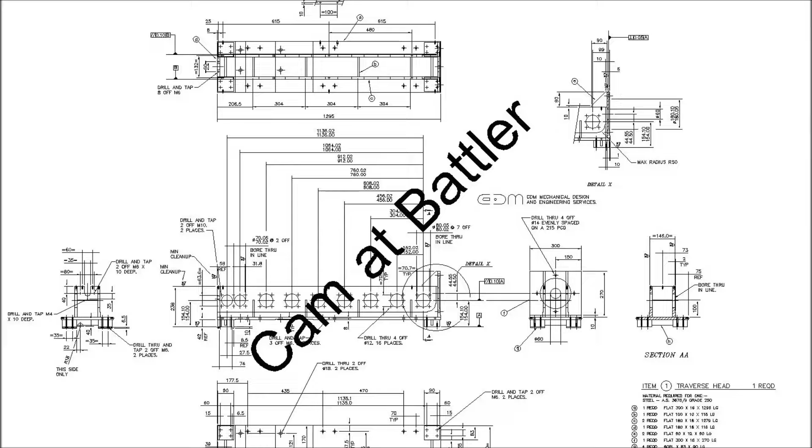I was sort of getting to the last bits of machining up the crank arm, and it was coming together beautifully. Beautiful feeling finishes, everything bang on tolerance, looking really good. And had a major slip up at one of the final machining operations, and yeah, it's now going to go into the trophy case. It's a throwaway, so I've got to start this one again. But you'll see what happened at the end of the video on that last machining operation.

But a lot of it comes about because I'm rushing around too much. I'm rushing around an awful lot. Running late from work to get to the school pickup. My wife's working back at work, and she's got to get home to get stuck into her study. She's got a paper due at uni, so she's flat out with that. Trying to get tea organised, then doing the drop-offs to the sporting activities, and then organising the pickups, and sort of getting out for 5 minutes here, 10 minutes there, watching the clock before I've got to go and pick the kids up again, and just not thinking, and bang, it's stuffed, and yeah, we're starting again.

So I'll pick up on this from where I finished off, where I stuffed it. So it's been a bit of a long road on this one, I must admit. I don't get a long period out in my workshop. I sort of maybe get an hour at a stretch at a time, and that makes it a little bit hard to try and get the continuity happening on projects. And I guess that's one of the reasons why this is taking so long. And I must admit, when I do get here, I really enjoy it, but it's not as much as I'd like, and that's family life.

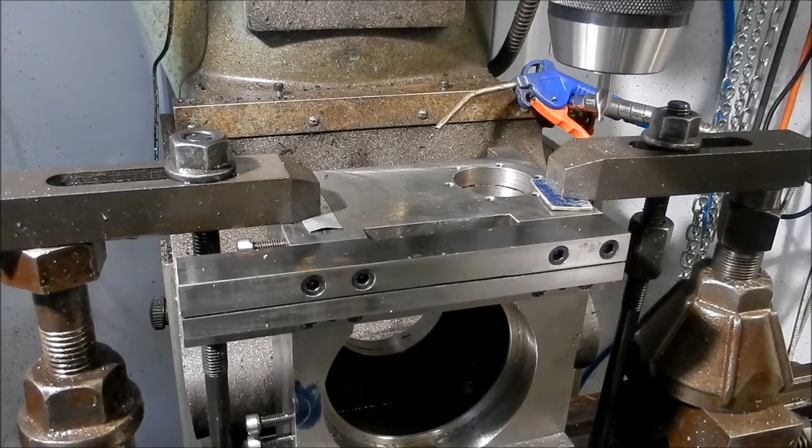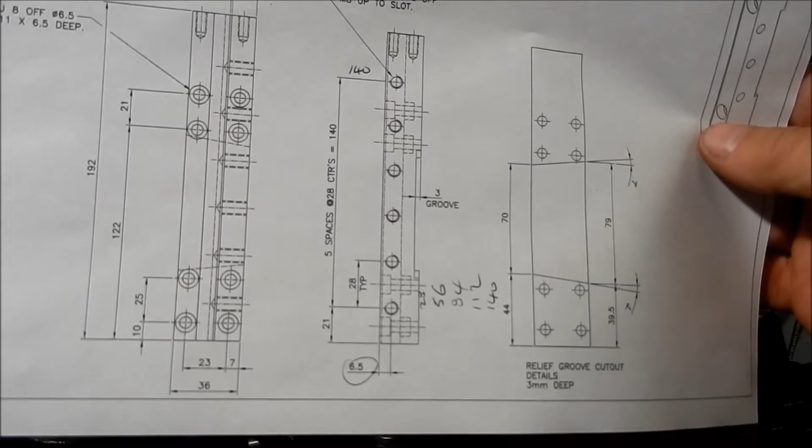We'll see how that comes up. All right, so what we're going to do tonight is the drilling and tapping for the gib adjusting screws. You can see them on the side here. I'm actually going to drill through with a flat bottom drill and just spig it in a couple of millimeters rather than doing it through with a drill point. So tapping size for the M8s is 7mm, and I've just ground up a flat drill to do that little divot inside, and then we'll just reshape the ends of those little grub screws.

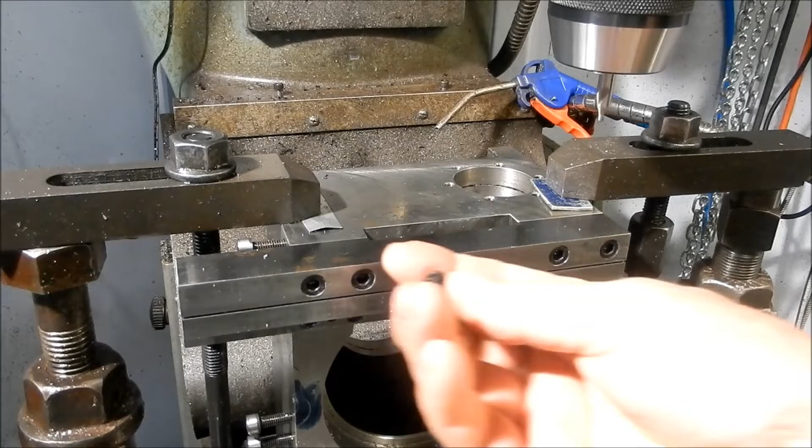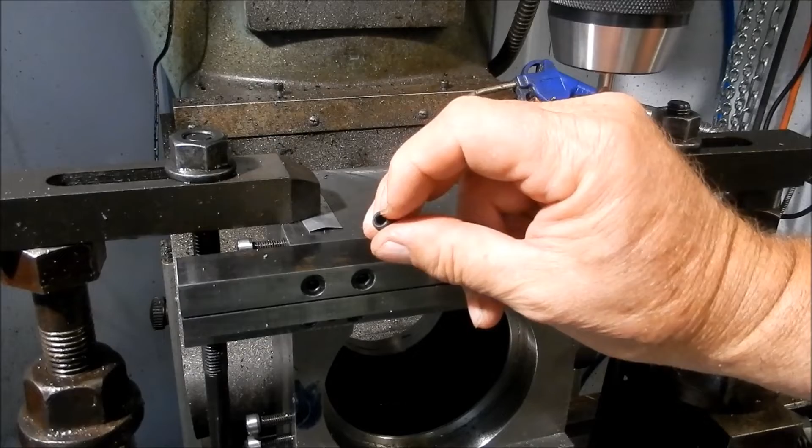So these blokes just here, we'll reshape those so that they fit in. I could have gone M6 there, but with the grub screws, the Allen keys are starting to get a little bit small and fiddly, so M8 with that size Allen key is quite comfortable to work with to nip them up as we're going. And as you can see, I've actually stoned back, and it's come up fairly good where we cut that slot with a slitting saw. A little bit of damage just around here where I was in there with my picking tools, picking teeth out. And what I might even do is run a tool down there with an arris.

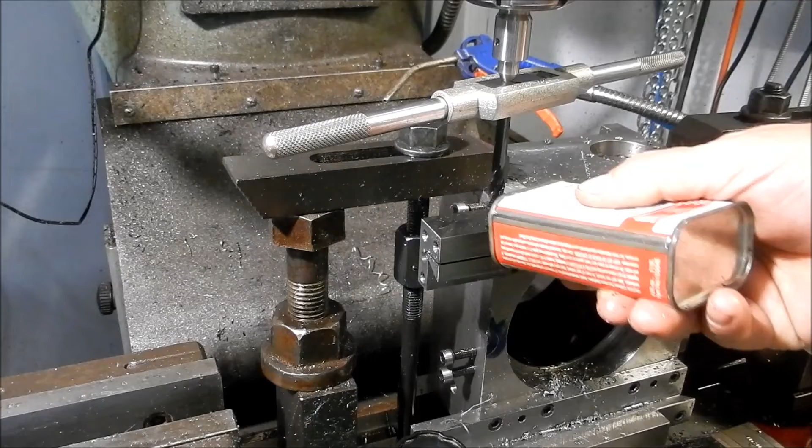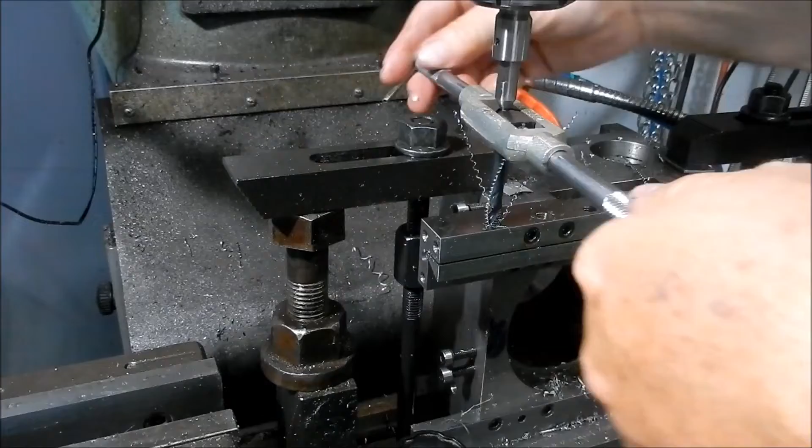Alright, last one. That's it. So these spiral taps are absolutely wonderful. I'm really converted to them. No chips getting stuck on the bottom. Jigs out beautifully. That's it. Alright, I'll just run over with a chamfering tool and just deburr those out. And we'll set up next to do the modifications to those grub screws.

Alright. Finally finished with this Gib set. Thank goodness. It's been a bit of a saga.

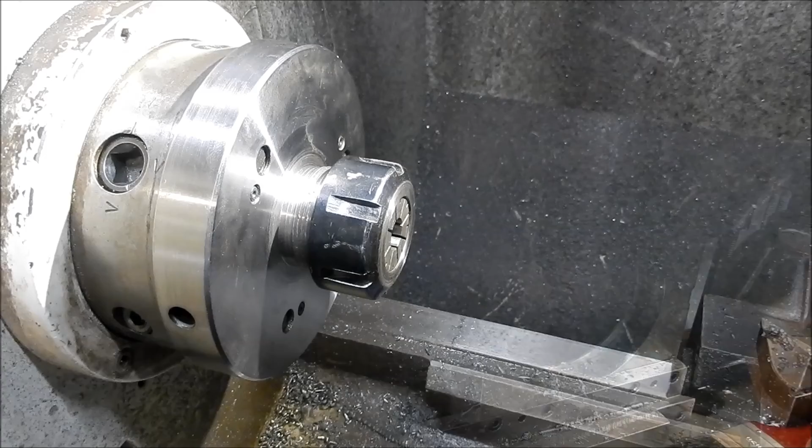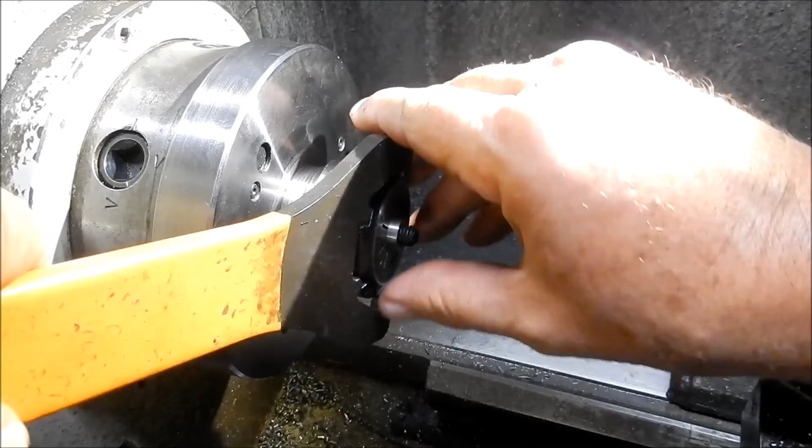Alright, we got there. Alright guys, so just modifying these grub screws for the Gib adjusters. And I've just made up a little split collar. Once again, that was just turned down and slit with the hacksaw, which is a much safer way of slitting, believe me. So it's much as we did before with the other adjusters. And I'll just try and work around the camera a bit without knocking it too much.

So I just turn the thread down for a 3 mm length down to about 6.5, face it off, and then we use a universal radiusing tool. Just use a file. Just trying to work around the camera here. Out she pops. And there it is. Nicely radiused off, ready to go.

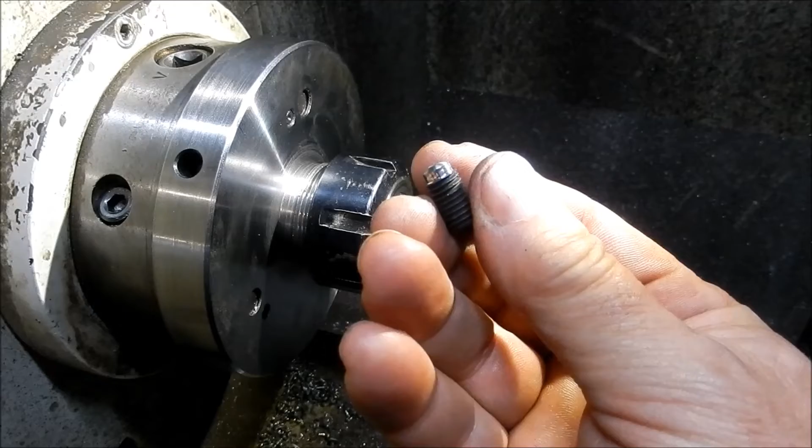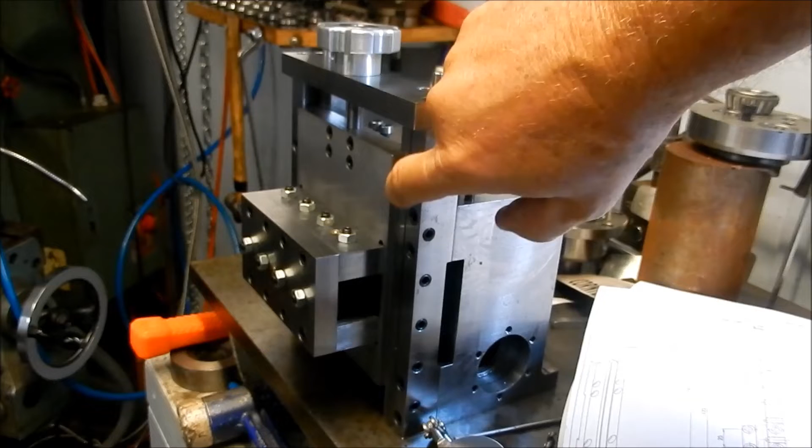Righto guys, we've got our little Gib adjusting screws in. So that's got a nice firm feel to it, going up and down. I'd say that when I've slit that, it's sprung just a little bit. It just went in just by tapping it with the palm of your hand. But once these get nipped up, once you're on centre, or the position that you want to be for your side cut, I won't push this, but that has locked up very tight. And it doesn't take much.

Now, realistically, I'm probably only going to use 2 of these at any one time. But no, very happy with the result. So that'll lock that nicely in place to do our slotting with the ram. All right, it's another job down.

Next thing I think I'll start is the crank arm. It's going to be moving in and out of here on the crank disc, which is, I can grab it up here. So that's our crank disc. So we'll make up the crank arm and the pins, and we'll start getting that into play. So it's sort of starting to get fairly close towards the end.

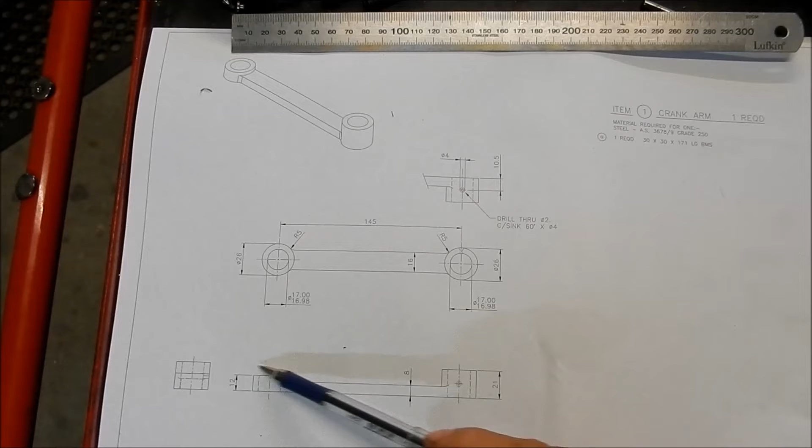Yeah, we'll rough it out with a milling machine first, get it to shape basically, get the holes bored, and then we'll set up in the rotary table to do the hemispherical ends on them, or spherical ends. Once again, I've got lubrication that does drop into there that feeds the bush, and we're going to have lubrication into here through the actual pin itself.

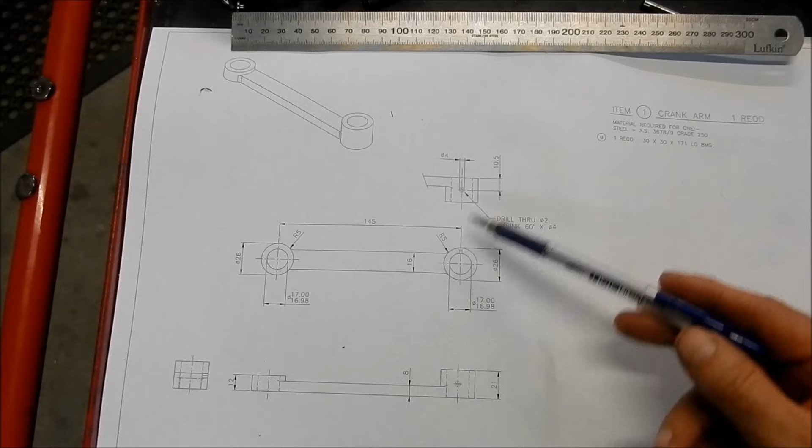So fairly straightforward. I had down there 30 by 30, but I haven't got any 30 by 30, so as I said, it'll be a bit of 25 by 50 stock. So we'll go and find some more stock that we can do that with, and we'll make a start.

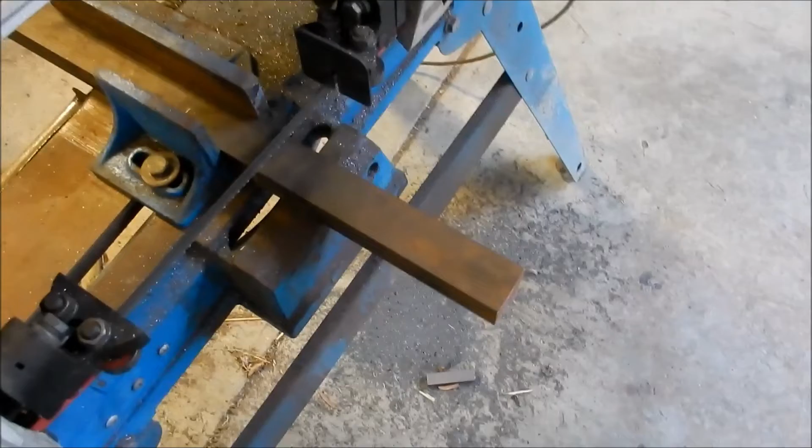Alright, change of plans again. I found a bit of 32 square stock, which I think is the old 1¼ inch stuff. I had this stock lying around for a long time. I've made up a whole heap of T-nuts out of it, and I knew I had it somewhere, but I couldn't find it until just now. So we're going to use that for our stock to make up the crank.

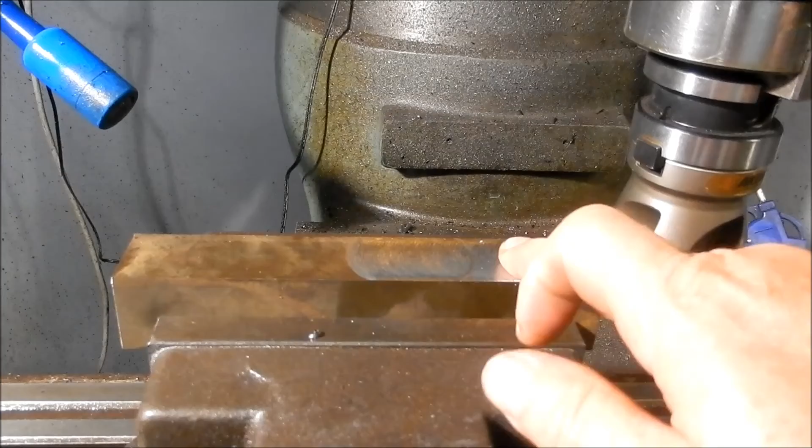Alright, done. I think we'll kick off on the mill first. Righto, I'm just going to take a couple of mil off all round on this, maybe 3 mil all round. The reason being, this is bright still, and as I've mentioned in one of my other videos, when it's bright, it's drawn or it's rolled cold, and that sets up stresses within this metal.

And when we start machining it, those stresses then start to relieve out, and that manifests itself in this material moving or bending. So I'm going to work it all the way around all the sides, get all those stresses out so at least it's stable, and when we come down to our final machining it's not going to be moving around too much. So one of the things I don't like about bright steel is that it does move. I'd much rather use the old black crusty stuff for this sort of work, but that's all I've got on hand, and we'll go with it.

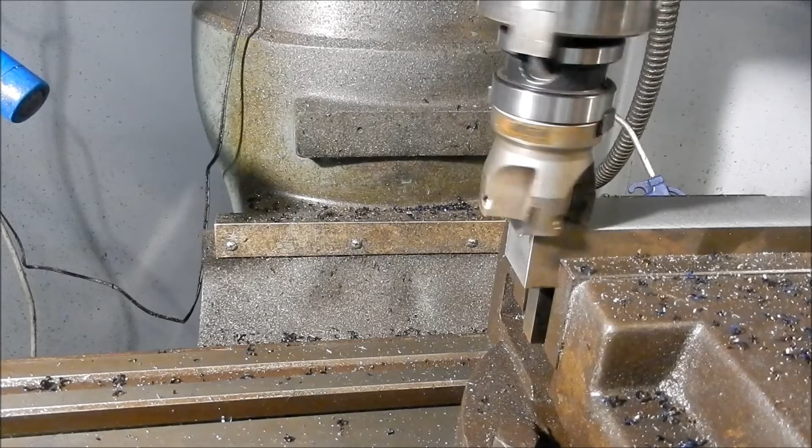Alright, I'll continue knocking this down to rough it out, and we'll come back when we've got some stock that we're going to start doing some final machining on. Just thought I'd bring you back very quickly just to show you how much this is actually bowed. So when I was running the cutter back, I've touched on that edge there and that edge there, so I haven't touched in the middle. So I've got around about a 0.15 millimeter bow on that at the moment.

So it just goes to show how much this bright mild steel does actually move when you start machining that skin off and letting that stress relieve out. So, as I said, we're still roughing. We'll bring you back when we're at a stage where we're going to start finishing it out. Right, just by way of a demo, we'll see if this side is bowed as well. So we'll just let it scratch across there, and we'll see if that's an even cut all the way through on this last unmachined side.

There you go, so you can see that that is quite bowed. Let's see how far that actually goes. That was more like 0.15, so you can still see we're not quite cleaning up the middle there, so you can see very graphically just how much that bows when we start taking that skin off that bright mild steel bar. Alright guys, I'll keep going.

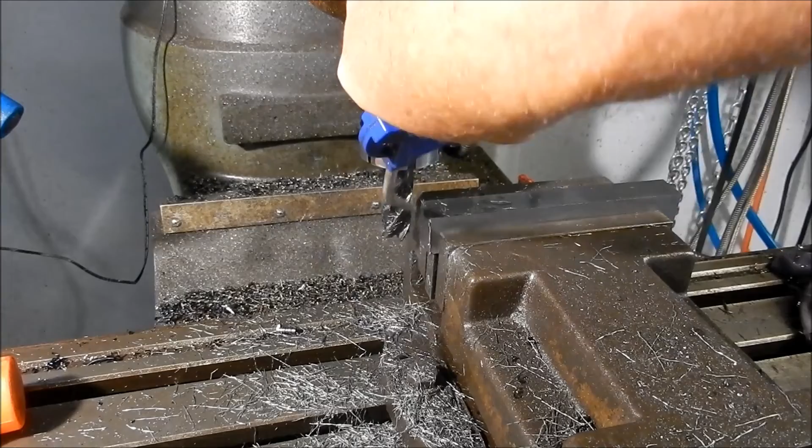71.54. Yep, it'll do nicely. Alright, what I'll do now is we'll start setting up to start roughing the guts of this out on top and also in on the sides as well. So we'll get set up and we'll get started on that. See how this looks with the camera.

Okay, so what we're going to be doing now is we're just going to be roughing out the thickness of that web. So I've got roughly 5mm off each side, and I've just marked a bit of a witness line that I'm going to come do for roughing out. And then once we've got that roughed out, we'll set it up and then we'll start reducing that web thickness down and reduce the other boss down as well. So we'll get this whole thing basically roughed out.

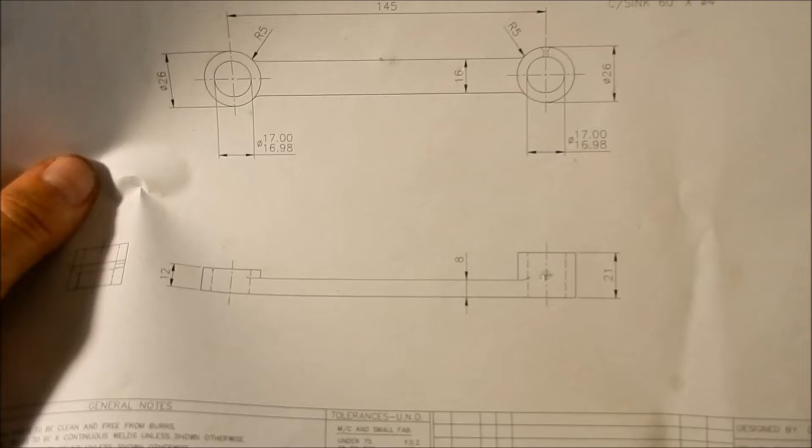Once we're roughed out and we're fairly comfortable, then I'll set up and we'll do the bores, and they become the datum points for everything else that we do on this job. But we'll just spend the time, we'll get it all roughed down, roughed to shape, and then we'll go on with the bore sets.

Righto, that's the dog bone shape roughed out. What we'll do now is we'll flip it up on the end and we'll bring it down to the 21mm and the little step down as well. And we're going to start looking at setting up the boring.

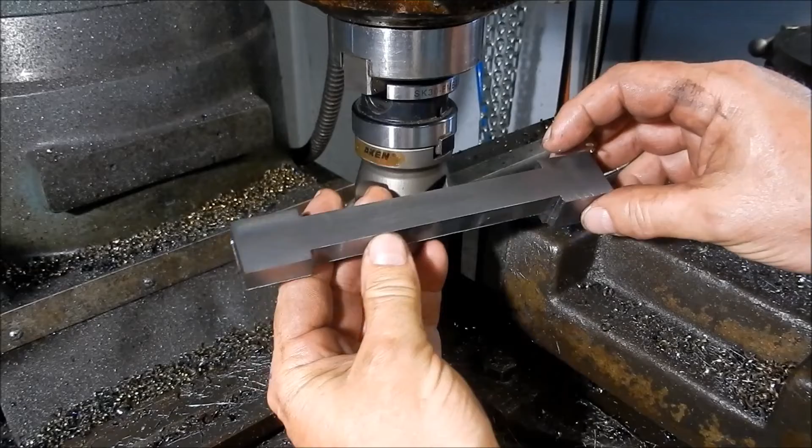And that's the problem with this steel, the bright mild steel stuff. It's not as stable as the black stuff. It tends to move around a fair bit. Right, okay, so I've just flipped it over onto its back here at the moment. We've machined that dog bone right down, fairly thin. Before we go and do any machining on that, I just want to make sure that we've got this nice and flat. And I suspect this is bowed a little bit. So I'll just have a look at it.

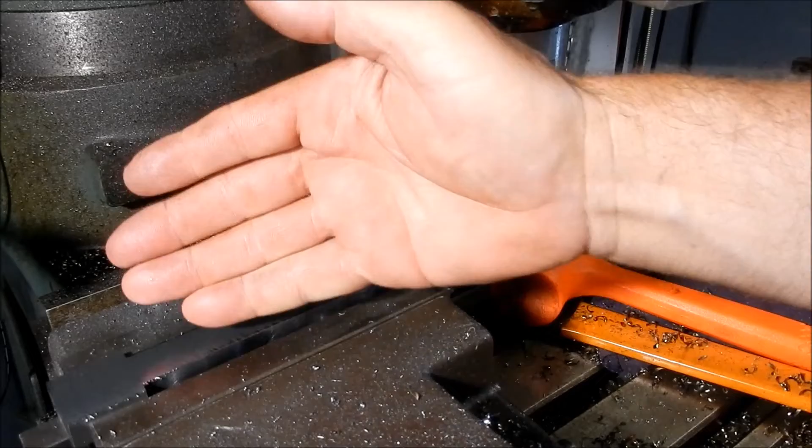Right, that's just managed to clean up in the middle there. And you can see why it's important to keep flipping the material around to keep working out those stresses and that subsequent movement that we're getting in that material. So that's reasonably flat all over now, both sides. So I'll flip it back now and we'll take the step out over that and we'll get set up for the boring.

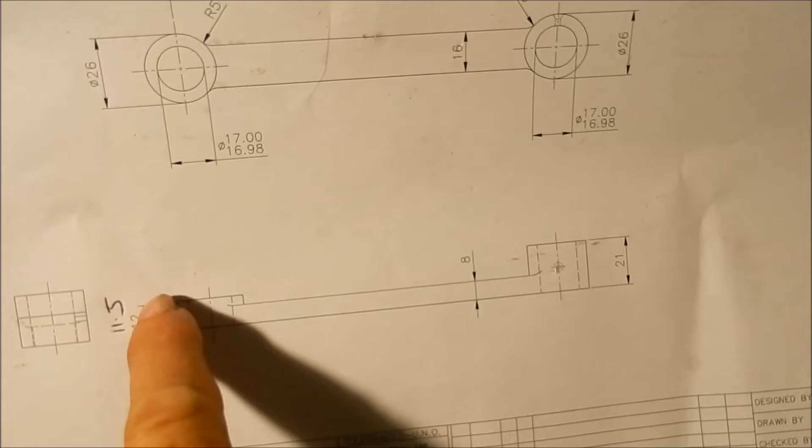Righto guys, we'll get on with the next operation. What I'm going to do is get these surfaces here machined off to height. So this one's going to be 21. This one, as I said, I'm going to make 11.5, not 12, because of that 0.5 millimeter difference we had in the slide, which is making that slide plate sit in a little bit deeper, just to give us a little bit more clearance. Now we've just got to machine that step out as well.

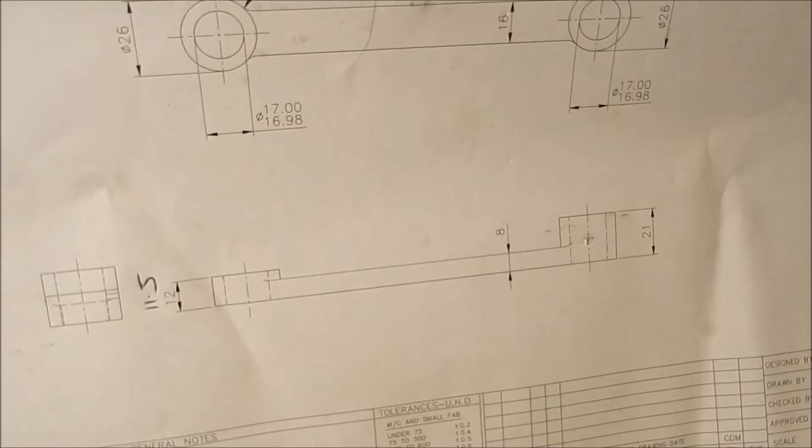So I've got it set up in the mill. We'll get those operations done and basically we're going to get it back to size. So I think this is

Righto, so I've had to do another setup again. I've had to pack this up a little bit higher. I was just touching a cutter. I still had another mil to go. I was just touching the top of the jaw. Something I hate having to do is to reset up again because I've run out of clearance. But anyway, we're done again. Let's get into it. Got about 1.28 left to go on this one.

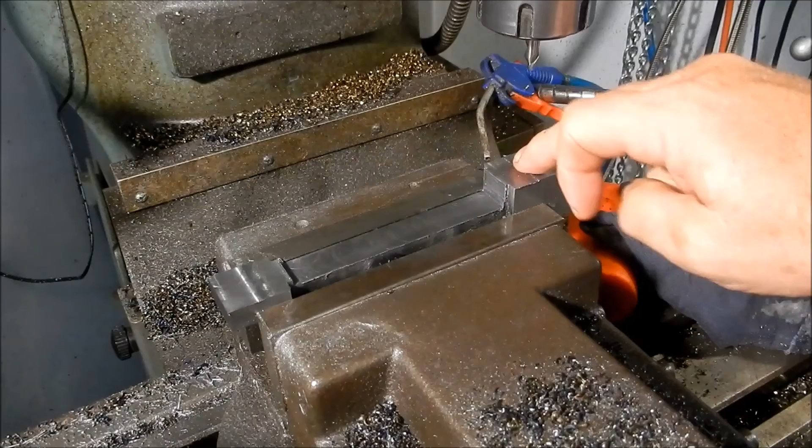Right guys, we're going to get set up to do the 2 bores in here. Both bores are 17mm, so what I've done is I've used my edge finder, split the difference, come in half, and I'm going to come back 72.5, so we keep an even distance from the edges here. I've allowed about 0.3, 0.35 to clean up when we're cutting those radiuses. So we'll center these off first, put a pilot hole through, and then we'll open up to maybe 5/8, and we'll set up the borer. And we'll bore these out to size.

Better get out of that gear. It's better. Alright, that's something I realised I hadn't done. Just to come off the edge and come across to get it centered. Well, it doesn't look too bad actually, but yeah, we better get that right. Alright, I'll come back when I've got that in center. Sunday morning, bit of a brain fade.

Righto, take 2. I've put a bigger center in here because I think I'm going to need it to take that out because it's probably just a little bit off center. I want to take that right out so that we get a true hole to put a pilot through. That's the biggest centre I've got. Yeah, it's cleaned it out. Alright. Go up and set up our pilot drill. We'll go through that and then we'll open it up to 5/8 and set up the boring.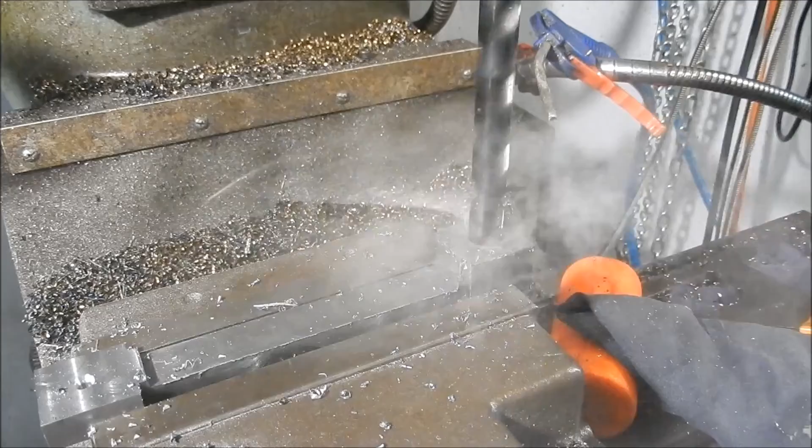Alright, just a little tip, this is a 12mm drill. I've just ground that up, and I always split point my drills to take a little bit of the load off the downward pressure. Also allows the coolant to get in there a little bit easier as well, but it just makes it so much easier to drill if you split point them out. Alright, we'll swap this over for a 5/8 and we'll come back.

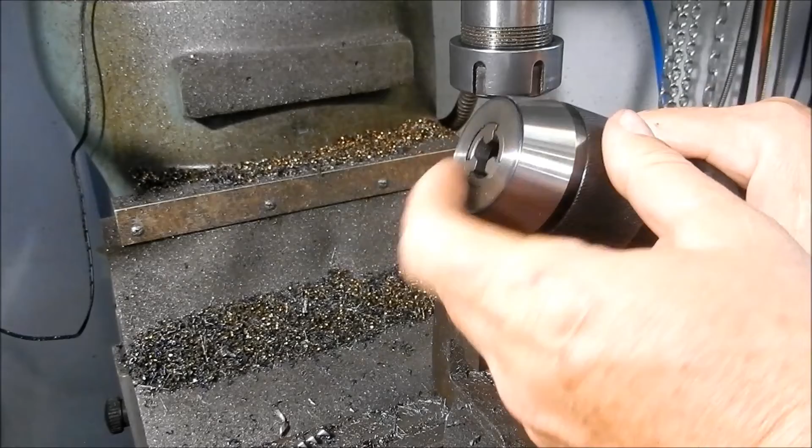Right, I'm keeping this in the ER32 collets to drill these through. I do have, it's a fairly cheap one, but one of these chucks that you do up with hand pressure, and I find that if these drills grab when you're in here, you've got to get out with a pair of Stilsons and try and unlock that. And I have had it, as you might have noticed in one of my other videos, where I actually stuffed it up totally. The jaws were absolutely, it was a throwaway. So Jacobs chucks are fine. You can do them up with a key. These ones here, they tend to tighten up even tighter and you just can't get them out. So I do them with the ER32 collets. It's a lot more comfortable.

Righto, done. We'll set that up with the boring head now, and we'll take them out. Righto, we've got our boring head in now. What I like to do is to zero it out, just for a clean up, and then measure it, and then I can come from my zero and know exactly how far I've got to come out, rather than trying to add and subtract odd percentages. I'm just feeding this through by hand.

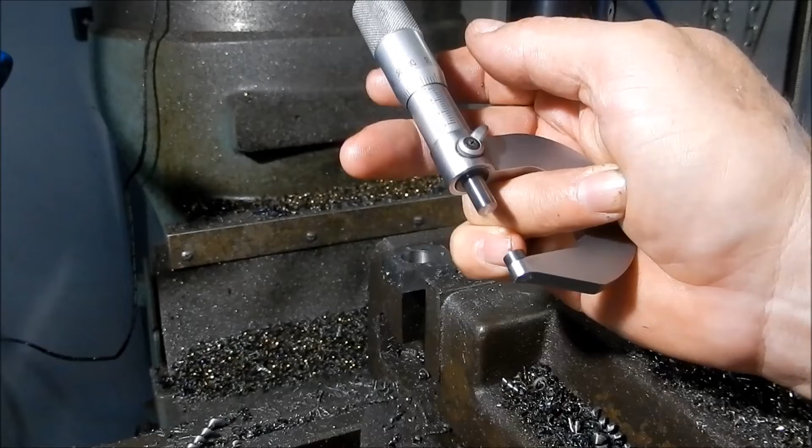So what we'll do, point 1, point 2. Okay, that's 16.7. 16.7.

Just touching there, bang on 17. Right, we'll set up on the next one. Right. Oh, about 0.05 over. That's pretty close. All right. Let's leave it at that.

Right, we're going to set up in the rotary table now to start doing our radiuses. So I'll put the pallet back up on that and we'll get that clamped into place. All right, guys. Well, this probably has disaster written all over it, but we're going to take every precaution, and for once the camera is actually going to be in my favour because it's actually acting as a barrier, so I'm not going to go any further than this. This is going to be spinning around at a fair old rate of knots.

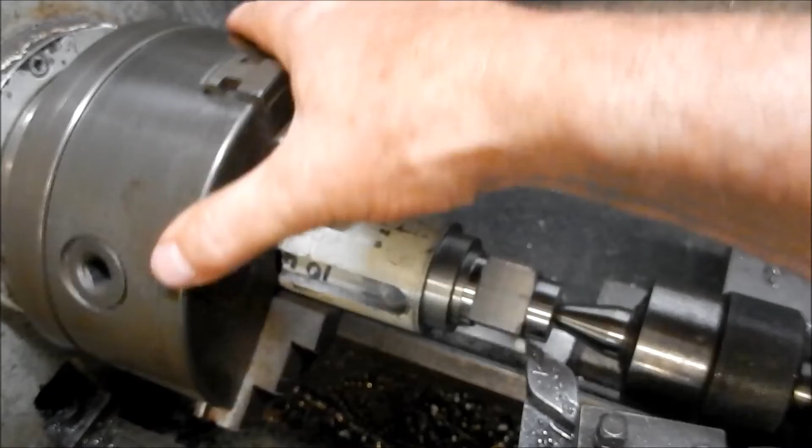I've got this set up into a spigot. Actually, I'll take it out and I'll show you. And we're going to start machining. So I've got a centre button here that I've made up. He's going to fit up inside there, so we've kept it concentric all the way through. If I can get the button in there, dear. Bit of a start, there we go. And we're just going to do this as a

friction drive. Now, I've done a lot of machining like this in the past, but never with an overhung load like this. Now, I've also got to be careful in that I'm getting up very, very close to the saddle, so I've got to make sure that when I'm at my finish point, I'm not going to hit the saddle and I'm clear there, but only just.

Right, let's look at the drawing and see why we're doing this. So on the drawing we have a raised boss here and we have a raised boss here. So I'm going to turn this raised boss section on both sides. So I'll have that raised boss machined down to the actual arm part of the crank. And what that will do will give me a witness to then use the end mill to come along and a point or a witness point that I can finish that end mill at.

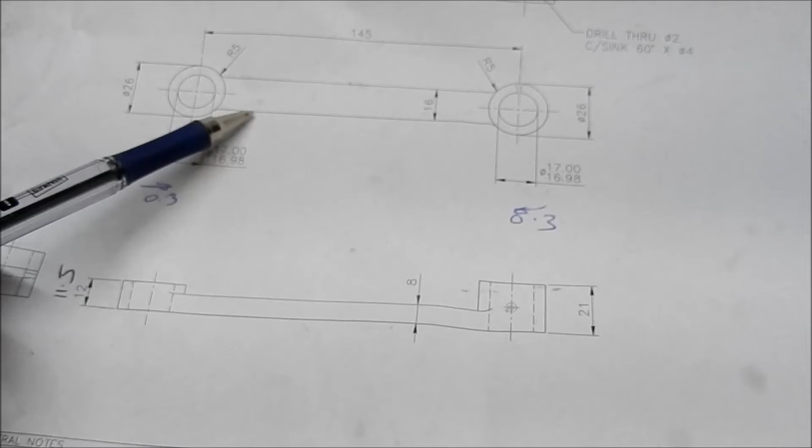So when we set up to do the half round in the rotary table, I know that when I bring it around with my cutter it's going to meet that perfectly, because we've already milled that up to that boss that we've pre-machined as a witness point.

But we've got to get past this stage first, so this little button I've made is about 1/2 mil smaller, so I can get my micrometer over it. What I'm going to do is set up a rough 0 point that I know that I'm going to come to, and set that z-axis to 0 on my digi readout.

Now, I haven't actually started doing any machining with this yet, so this will be the first time. As I said, we're just going to friction drive. If it's not grabbing, what I'll do is I'll put some super glue onto that face there and we'll see how that goes. Alright, well, let's give it a go, eh? If we put it into gear might help.

And this isn't a working diameter. 26mm is the nominal. So let's see where we're at with that. So we're at 27.16. It's got 1.16 to go. .005.

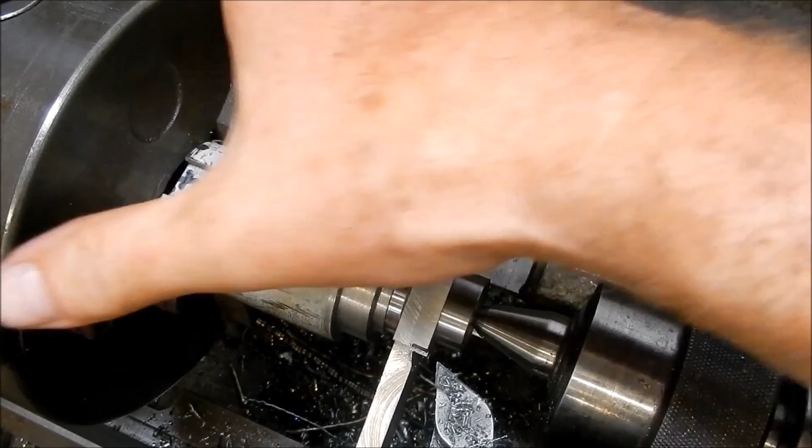Oh, you're joking. Oh no. I've moved the saddle back to clear and I haven't re-zeroed it again. So I moved the top slide back to clear and I haven't re-zeroed it again. And look what I've done. I've really stuffed it, haven't I? It was going along beautifully. One stupid mistake, moving the saddle back, forgetting to re-zero it, and look what I've done, guys. Well, there's no coming back from that other than I'm going to have to redo it.

Dear me. Well, that's another one for the bin. All that work up the spout. Just when you think you got on top of it and you just have that little brain fade and you don't think, and look at what happens. My own silly fault. Alright, let's get it out. I'll stick that one in the trophy case, I think.

Look at that, that was an absolutely beautiful finish. And we just stuck a sawtooth in it. Guys, check, check, check and recheck. Alright, well, let's start again.